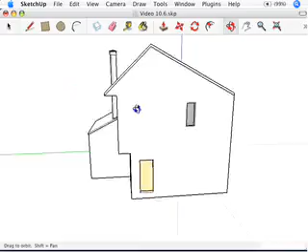There's nothing that really exists like a section in real life, but sections are incredibly important tools for you to be able to get inside, basically look inside or cut away part of the thing you're building. People use sections both to work on the inside of things, and to show the inside of things or hide parts of things from their audience when presenting.

So without further ado, let's talk about sections. To create a section, all I have to do is go to the Tools menu and choose Section Plane right there.

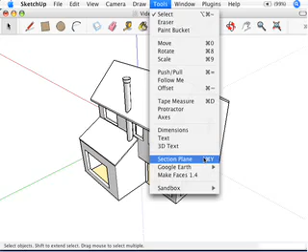When I choose Section Plane, I get this big funny cursor. You notice how it's this giant green rectangle? Actually, I guess it's kind of a square. It's going to change shape depending on where you have it. Right now it's kind of loose, it's a square, but you'll see it turns into a big rectangle after I place it.

Now what I'm doing here is dragging this green rectangle around the model, and it's snapping to different planes. Notice how on this slanted roof, it's actually slanted itself. Down here it's also slanted. Over on this wall it's facing off to the left, and on this wall it's facing off to the right. If I hover over this round chimney, you see how it's spinning? That's because it's always facing the surface you have it hovering on.

Okay, ready? This is going to be quick. I'm going to cut a section on this side of my house. Watch what I'm going to do, I'm just going to click. And what I've done is created this big giant section plane. See how it's a big orange rectangle like I said it would be? And the end of my building's gone, just like that.

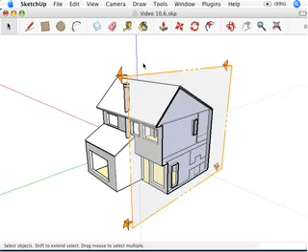I can see that end of the building, but this building's gone. What I've got to do is grab the Move tool at this point, because I want to move this section plane. I'm going to click on it and then just move it. And you notice what's happening? You see how part of my model is being cut into with that section plane?

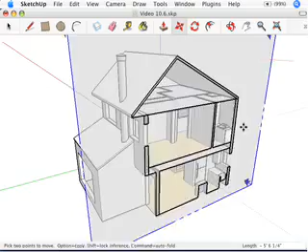Now, the important thing to realize is it's not actually disappearing. If I move this out of the way, I've still got the house there. But let's zoom in some, just like this. As I move this section plane back and forth, I'm actually cutting through the house as I move through here. It's a pretty important concept to understand.

Let's get it to a good spot. That's kind of a good spot, sort of through a doorway. There we go, and there's my section plane. What I've done is actually place that section plane.

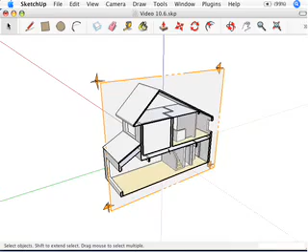This is kind of an object in SketchUp, it's kind of a strange thing. It's an entity, sort of like a guide or an edge or a face, but I guess what I would call a construction entity. It doesn't really show up as part of your model. It's kind of a thing you place in your model to help you model and show off your model, if that makes any sense.

Once we've got that section plane on there, it's kind of ugly, so what I want to do is hide that section plane. What I'll do is go up to the View menu and deselect this Section Planes option. So what I don't want to be able to see is the section plane that I just created.

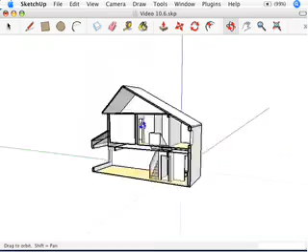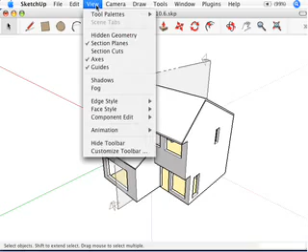What I do want to see is what's called the section cut, which is the cut that the section plane created. If I go up to the View menu and deselect section cuts, the cut actually goes away. And then if I go to View and select section planes, now I can see the section plane, but not the cut it's producing. So using those two things in combination, you can choose to watch the planes or the cuts, or no planes and cuts, or no cuts and planes.

It's kind of up to you. But the general premise is that a section plane, once I've changed or placed it, is actually creating this section cut effect right there on my model.

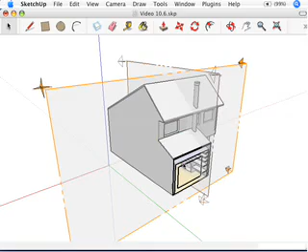Let's get another section plane. I'm going to go up to Tools, go to Section Plane, and this one I'm going to cut this way. I'm going to use the Move tool to move it over some. Let's move it—I'm cutting through the building this way now. What I want to actually do is cut through the stairs. So there we go.

Now you'll notice what I have in my model is two section planes. I've got this one that's kind of gray and this one that's orange. And you'll notice that the gray one is no longer cutting anything—you see how it's not cutting through the house? It's just sort of placed there.

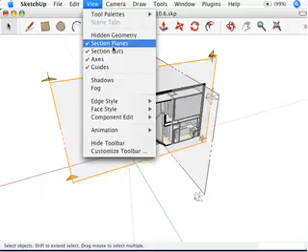Now if I go up to View and say hide my section planes, they both disappear, but the active section cut is the one from the section plane that was orange, if you notice that. You can only, in general, have one active section plane at a time in a SketchUp model.

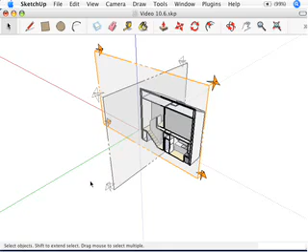There is an exception to that, but I'm not going to go into it. What I'm going to do is right-click. Let's say I wanted this section plane, the one that's gray right now, that was cutting through the house this way—let's say I wanted that to be my active section cut instead.

I'm going to right-click on it, and I'm going to choose Active Cut from the right-click menu. When I do that, it changes, and all of a sudden that section plane is orange and the other one is gray. Let's swap back—I'm going to say Active Cut, so my cut is changing depending on which section plane is selected.

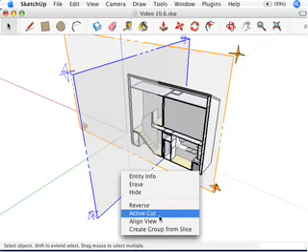Okay, I'm going to get rid of this section plane, the second one altogether. So let's just delete that, and we're working with one section plane again.

Now, let's say I wanted to keep this section plane, but what I want to see is the other half of the house, the part of the house that's kind of being cut away by that right now. I don't have to create a brand new section plane.

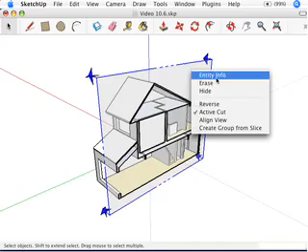I'm just going to right-click on the existing one and go Reverse. When I do that, it reverses the direction of the section cut, and now I'm looking at the other half of the house, the stuff that I had cut away the first time. So let's go to Reverse, and now I'm looking at that half. It's kind of that simple.

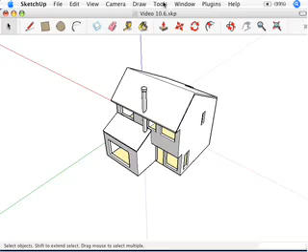Let's get rid of that section cut, and I'm going to create another kind of section cut. This is called a plan cut. So let's go to Tools. It's made in exactly the same way.

I'm going to pick Section Plane, but instead of hovering anywhere on the model, I'm just going to hover on the ground so that section cut is completely flat, just like that. Then I'm going to get my Move tool to move this up, just like that. I'm going to move it up 48 inches, which is 4 feet. It's kind of an architectural convention in North America to cut plans at 4 feet.

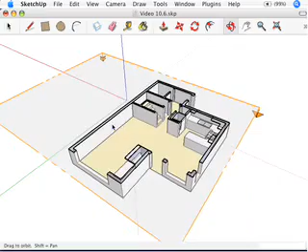Let's go up to View and Section Planes and deselect that. Now what I'm able to do is see inside my house. This is great because this is the view I would use to start throwing in furniture and stuff like that. So I'm going to use that section plane that I just created. This section cut allows me to see this floor really easily so I can throw stuff in it.

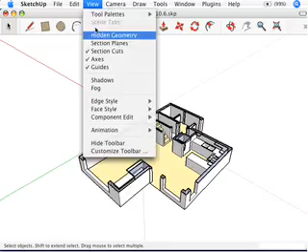If I wanted to work on, let's say, the second floor, I would show that section plane again. I grab the Move tool and just move this up to the second floor like that. And maybe hide the section plane again. Now I can work on the second floor if I wanted to—I could put some furniture in here. Okay, I hope that makes sense.

Let's see if there's anything else that I forgot to cover in this section. Nope, I believe that is exactly what I wanted to talk about. That concludes the video on adding section planes to your model for Chapter 10 of Google SketchUp for Dummies.